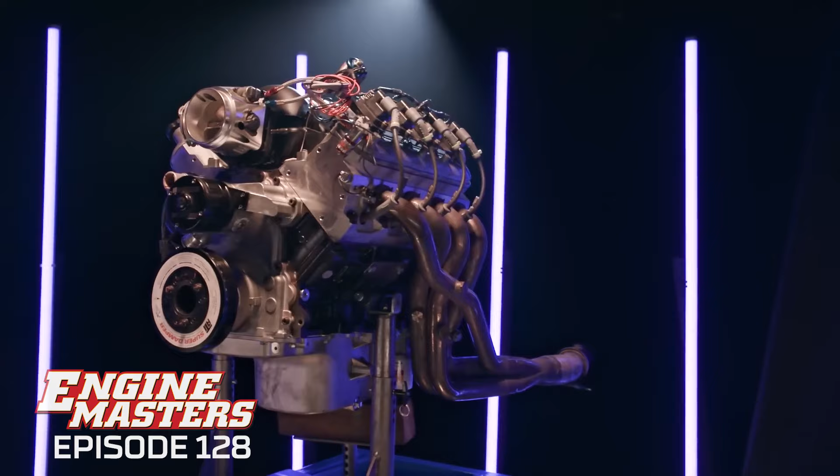Let's talk about the hardware that we're gonna use here. This engine is based on the super popular General Motors LS engine family. It's a 6-liter short block, but it's been stroked to 408 cubic inches. Up top, it's got rectangle port heads. They're a Blueprint Engines 259cc cylinder head. The compression on this thing is only 9.3 to 1, so it makes a little bit less power than you would expect from like an 11.5 to 1 LS.

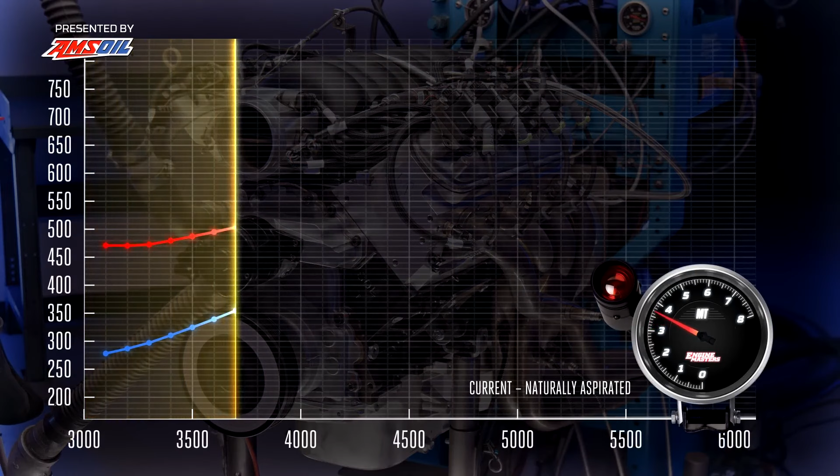This makes about 550 horsepower with a hydraulic roller camshaft that specs out at 225 and 238 at .050 tappet lift. It's on a 113-degree lobe separation angle. It's got about .600 lift. The intake manifold that we're using is just a typical passenger car bone stock setup. 545 pound-feet of torque and 562.6 horsepower.

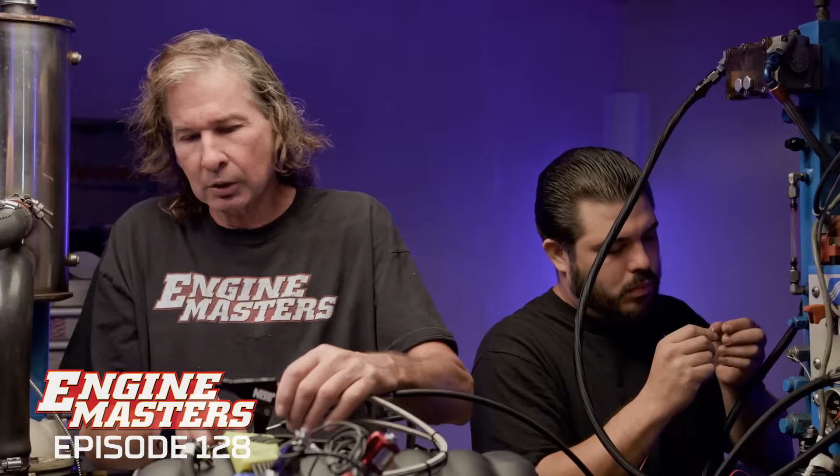What we have here is our wet nitrous system. Steve is going to remove the throttle body, and this will be inserted between the throttle body and manifold. We'll have gasoline injected through this pipe, nitrous through here, and hopefully it'll distribute perfectly in this dry air manifold.

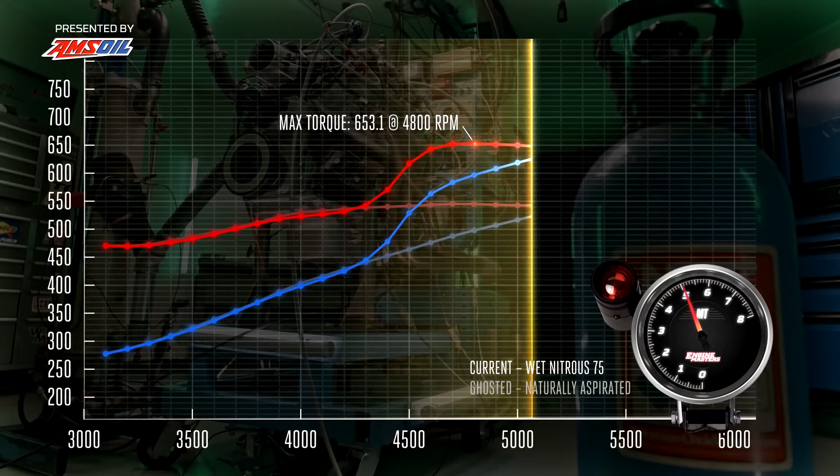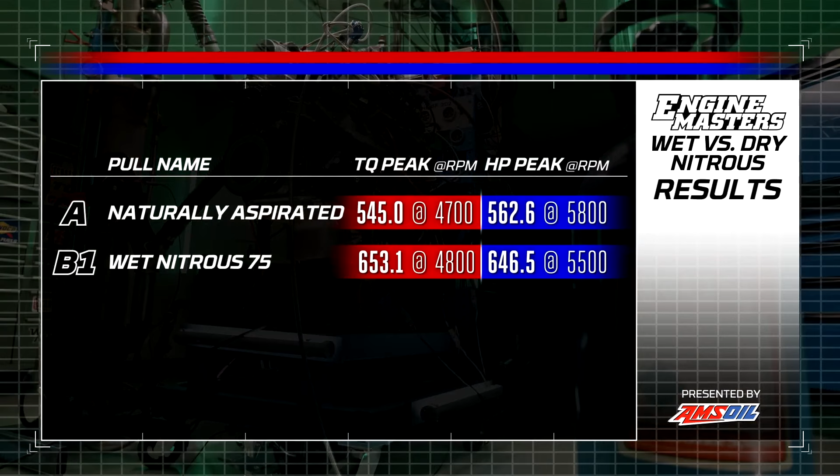Nitrous is always so rewarding. We just made 653 pound-feet of torque and 646.5 horsepower. We're gonna compare our baseline to the nitrous hit. There you go. So we went from 563 to 646.5. The jetting usually nails it. Yeah. It's a bit rich for my taste, you know, and that's not too uncommon. I mean, it's probably more likely that manufacturers played a little bit safe.

For sure. There's some tuning we could do here, particularly at this power level. This thing could run at NA power air-fuel ratios. We tuned a little bit. It went from a 26 jet, what did we put in there, a 22? Yes. Yeah, and it really didn't make that much difference in the air-fuel ratio. 4/10 or something.

I mean, it went from 11.5 to 11.9, and I'd be okay with this, like I say, at 12.5 or something. Right, but we're not going to chase every last air-fuel ratio, every last horsepower, because that's not what we're looking at here. What we're looking at is that cylinder-to-cylinder distribution, which looked pretty good. Yeah, I'd like to see the graph, though.

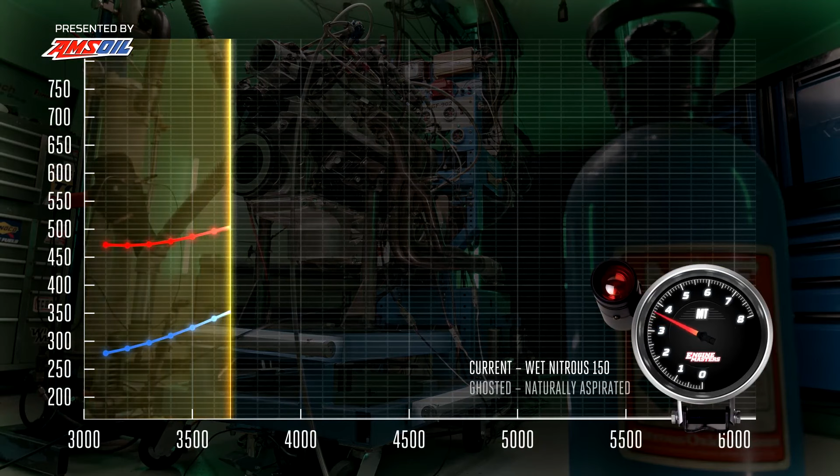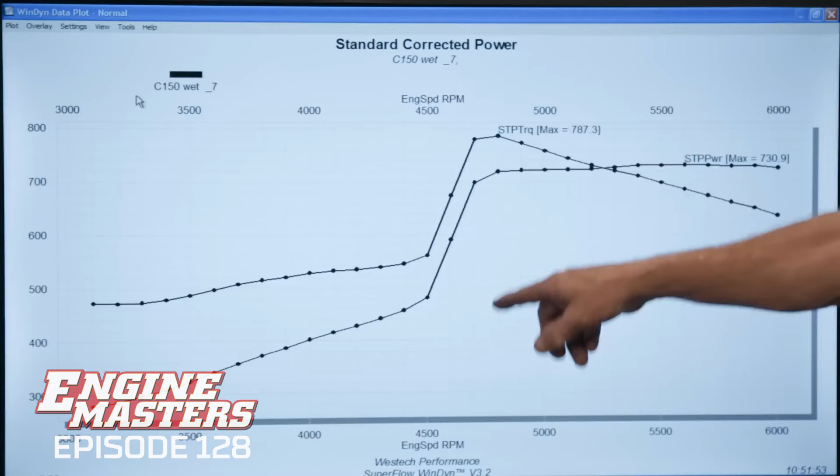Jets that were supposed to make 150 made more than that. A 168 jump. Our new power numbers are 730 horsepower and the torque, 787. This is starting to look like a curve I enjoy. Look how flat the power curve is. This comes in pretty flat. It's a decent tune-up when they're that flat and carry. That means the calibration is fairly close. Now you're starting to see that hard move like you're used to seeing. Yep, for sure. Pretty good.

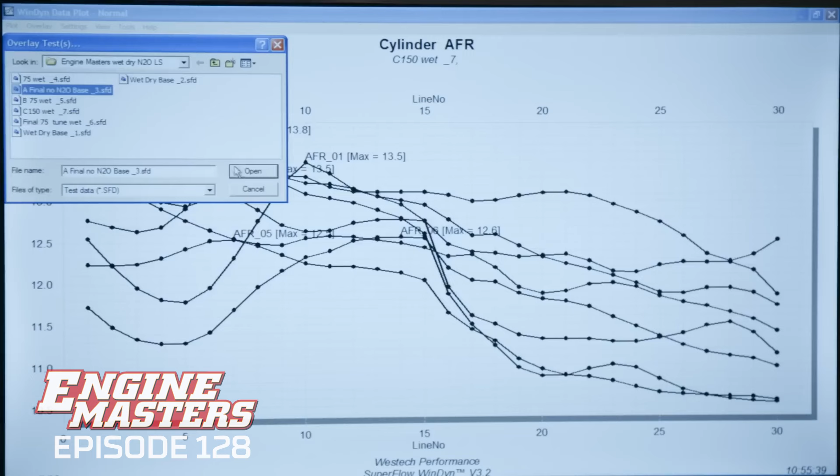Yeah, 13 to 1 is where we're just beginning to get into scary on nitrous. You don't want it that lean. Ideally, you want it basically at the same air-fuel ratio that it runs best naturally aspirated, and maybe a tick richer if you really want to be careful. I'm kind of wondering what the distribution looks like versus NA. Go for it. NA's way better. That's the answer. Let's take a look. Oh, yeah. Wow. Basically, this spread versus that spread. Yeah. So it's more ungood. It's getting sloppier as we're adding more fuel in there.

The thing this really tells you is that you can't completely trust your oxygen sensor in one pipe because it's giving you an average and you're probably like, man, I'm right on, I'm 12 to 1 or whatever. And you might have a cylinder at 16 that you don't even know about and blow your motor up. Yep. So next step is we're going to the dry shot. Nitrous only in the manifold and enriching it with the fuel injectors.

Here's the power numbers for our 150 horsepower dry system, 724.8 pound-feet of torque and 726 horsepower.